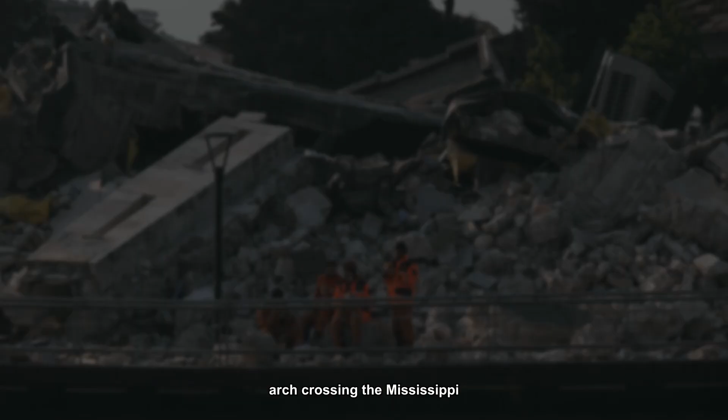On the evening of August 1, 2007, rush hour in Minneapolis was underway. The I-35W bridge, a steel truss arch crossing the Mississippi River, carried 140,000 vehicles daily. At 6:05 p.m., with 111 vehicles on the bridge, it suddenly collapsed. In seconds, 456 feet of the main span plunged 108 feet into the river and onto its banks. The failure killed 13 people and injured 145.

It was a shocking infrastructure failure that prompted immediate questions. How could a major interstate bridge in the middle of a U.S. city simply fall down? The answer lies not in a single cause, but in a chain of design errors, overlooked calculations, and construction decisions that had been building for decades.

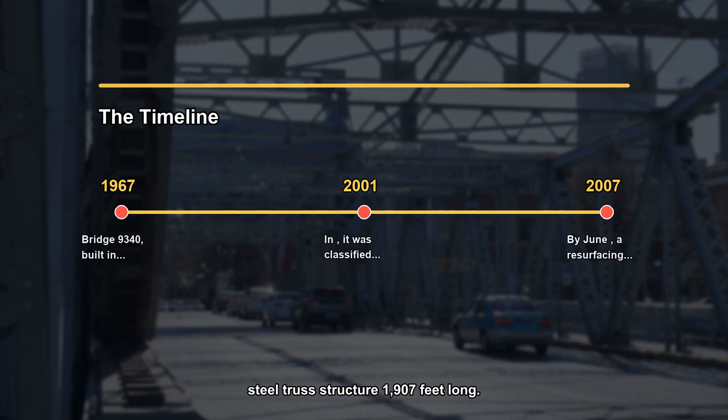Bridge 9340, built in 1967, was a steel truss structure 1,907 feet long. It had 8 lanes carrying I-35W traffic across the Mississippi. By the early 2000s, MnDOT inspections flagged significant corrosion, rusting, and warped plates. In 2001, it was classified as fracture critical. That term describes a bridge with no structural redundancy. A failure in a single critical element can bring down the entire span.

Despite growing concerns, replacement plans were deferred and the focus shifted to a reinforcement project. The bridge was Minnesota's 5th busiest, a vital transportation link. By June 2007, a resurfacing and repair project was underway, which would inadvertently add loads that the bridge's hidden design flaw could not withstand.

After the collapse, National Transportation Safety Board investigators zeroed in on the gusset plates, the steel plates that connect the truss members. At nodes U10 and L11, the plates were only half the required thickness. This design error dated back to the original 1960s plans. The original engineering firm had undersized these plates, and no one ever caught the mistake.

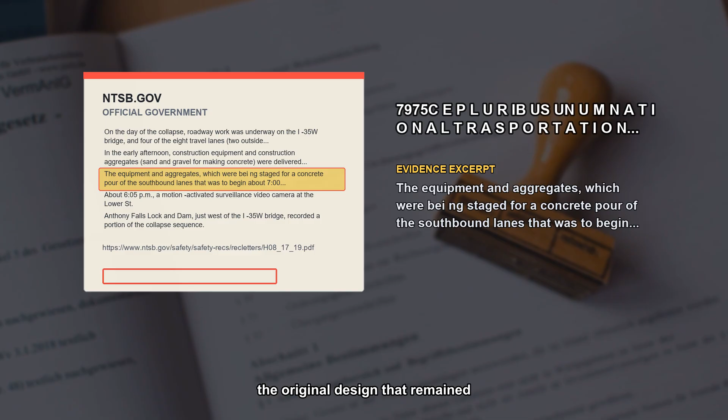According to the NTSB, the plates were inadequate to carry the design loads, let alone any extra weight. The gusset plate calculations were never independently reviewed. This was not an error of deterioration, it was a mistake in the original design that remained hidden for 40 years. The safety board concluded that the probable cause of the collapse was this design flaw, compounded by additional weight on the bridge.

The NTSB found that neither MnDOT nor the Federal Highway Administration had evaluated the gusset plate designs in sufficient detail during the original design or subsequent modifications. At the time, design review procedures existed for checking consultants' computations, but these procedures were not applied to gusset plates. It was not standard practice to do so. This gap meant that a critical structural component slipped through multiple layers of oversight.

The report also noted that this was not an isolated event. Investigators found other instances where questionable bridge designs were certified and approved at both state and federal levels. This finding exposed a systemic weakness in the nation's bridge design review process.

By August 1, 2007, a construction project was in progress to resurface the bridge's southbound lanes. According to the NTSB's Highway Construction Factors Factual Report, heavy equipment and aggregates for a concrete pour were staged on the bridge by about 2:30 p.m. They were positioned toward the south end of the center span, directly above the compromised gusset plates. The aggregates included sand, gravel, and cement, waiting for the evening's pour.

This staging, while routine for construction, created a load case that had never been considered in the original design. The extra weight, estimated at hundreds of thousands of pounds, added stress that the thin plates could not handle. Combined with rush hour traffic, the total load exceeded the capacity of the under-designed connections.

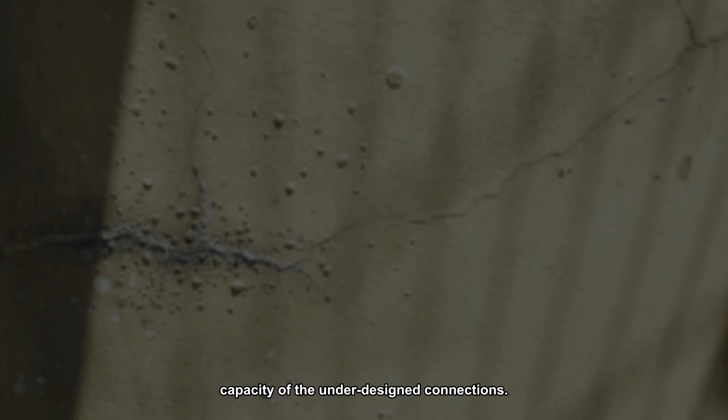The NTSB determined that the U10 gusset plates were the first to fail. As they buckled, the load redistributed to other connections, which were also undersized. With no redundancy, the failure propagated rapidly. The sequence was captured by surveillance cameras and eyewitness accounts. One driver described seeing the bridge fold in on itself.

The structural analysis later confirmed that once the U10 plates gave way, the truss was effectively compromised. The entire load was transferred to adjacent members, which were also overloaded. This cascading collapse took just seconds, leaving no time for escape. Within moments, the entire center span fell, pulling adjacent sections with it. Visual evidence from the docket shows the plates tearing through the steel. The design error had been waiting for a trigger, and the construction staging provided it.

In the immediate aftermath, emergency responders searched for survivors. The final victim was recovered on August 20, eventually bringing the death toll to 13.

The NTSB launched an extensive investigation, reconstructing the bridge from scattered debris and performing detailed computer analyses. Their final report, issued in November 2008, confirmed the design error as the probable cause. They also highlighted the inadequate review process and the role of construction loads.

The collapsed bridge was replaced with the St. Anthony Falls Bridge, which opened in September 2008, an extraordinary fast-track project. The new bridge was designed with multiple redundancies and advanced monitoring systems. The incident prompted nationwide scrutiny of gusset plate designs and inspection practices.

The I-35W collapse revealed a systemic blind spot. Gusset plates until then were often overlooked because they were assumed to be over-designed, but the NTSB and FHWA soon found other bridges whose gusset plates had similar vulnerabilities. For example, the FHWA's interim report on the adequacy of the U-10 and L-11 gusset plate designs detailed the calculations that should have been done.

In response, the FHWA required all states to review the gusset plates of their truss bridges. The problem wasn't limited to Minnesota, it was a national issue. The collapse exposed how assumptions in design and review can persist for decades until a failure exposes them. Later, research programs were launched to improve load ratings for gusset plates, turning a tragedy into a catalyst for change.

Following the NTSB recommendations, the FHWA issued new guidelines for load rating and inspecting gusset plates. Technical advisories on non-destructive evaluation technologies were published to help detect deterioration and design flaws. The Safety Board also called for changes in design review procedures to ensure that critical components like gusset plates are independently verified.

In 2010, the FHWA published a technical advisory on inspection of gusset plates using NDE, specifically addressing lessons from the collapse. States were required to inventory and rate all gusset plates on non-redundant steel truss bridges. These policy shifts aimed to close the review gap that had allowed the I-35W plates to go unchecked. The legacy of the collapse is, in part, a more rigorous approach to bridge safety.

One key lesson was that redundancy matters. The I-35W bridge was fracture critical, meaning it had no alternate load paths. Modern bridge designs often incorporate multiple load paths so that a single failure does not cause tragedy. Another lesson was the importance of checking the original design assumptions, not just the condition. Inspections had focused on visible deterioration like corrosion, but the hidden undersizing was invisible to routine checks.

The collapse changed how engineers think about risk in aging infrastructure. It also underscored the need for a safety by review culture. Independent verification of critical design calculations must be mandatory. The NTSB recommended that state DOTs and the FHWA place greater emphasis on the review of design calculations for critical structural components. This was a wake-up call for the entire engineering profession.

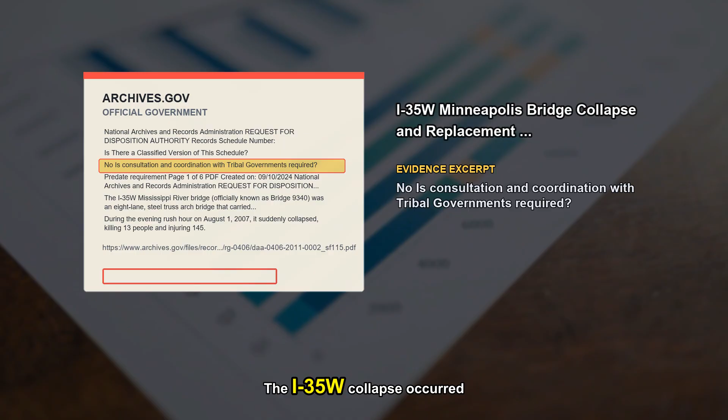The I-35W collapse occurred against a backdrop of aging U.S. infrastructure. According to the American Society of Civil Engineers report cards from that era, tens of thousands of bridges were rated structurally deficient. The Minneapolis bridge had been rated structurally deficient as well, but that rating was based on corrosion and fatigue, not the design flaw. The event highlighted the gap between what inspectors look for and the real risks lurking in complex systems. It was a wake-up call that not all deficiencies are visible.

In the years following, infrastructure investment became a national conversation. The ARRA stimulus in 2009 included significant funding for bridge repairs. The collapse prompted states to prioritize safety reviews over new construction, recognizing that hidden flaws could have serious consequences.

The I-35W bridge collapse was not an inevitable act of God. It was the result of a design error hidden in plain sight, a review system that didn't check the right things, and a construction project that unknowingly pushed the structure over the edge. 13 lives were lost and 145 people were injured because half-inch steel plates were not thick enough.

Today, the lessons from this failure are embedded in bridge engineering practices, but the reminder is sobering. Our infrastructure is only as strong as the weakest connection we fail to check. As the NTSB stated, the probable cause was an inadequate design of the gusset plates. That inadequacy was preventable. The collapse serves as a permanent reminder of the responsibility that engineers and agencies bear.

When critical connections are overlooked, the consequences can be tragic. The I-35W story is one of how a single design error, compounded by decades of inattention, led to one of the most significant infrastructure failures in American history.